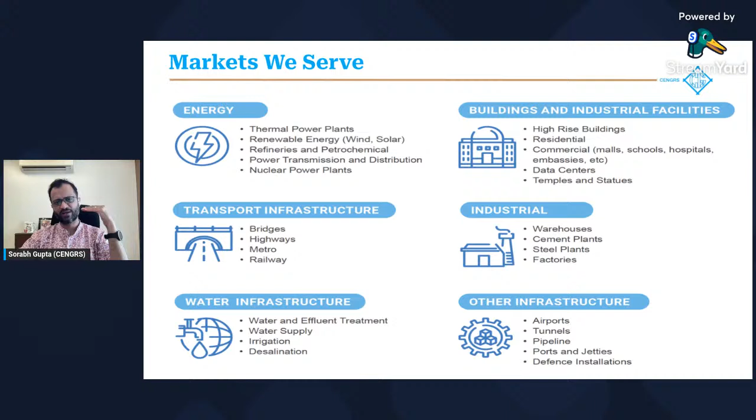Of course, you need investigations irrespective of the kind of project which you are building. We are very strong in the energy sector, where I think 70 to 80% of the thermal power plants in the country have been investigated by us. We have also worked a lot on nuclear power plants, solar, wind, building and factories, transport infrastructure, critical bridges, temples like the Ram Mandir temple investigation was by us, and so on and so forth. So pretty much we are excited to apply our knowledge and our expertise to any kind of project that might come up.

The company is led by Mr. Sanjay Gupta, who is our managing director, Mr. Ravi Sundaram, who is our technical director, and myself. I'm Sorabh Gupta. All three of us are from IIT Delhi, obviously with different years of graduation, but we are all IIT Delhi alumni, and our mission is to make investigations better.

This is a small map showing our project experience, and we have, I think, one of the largest private databases of geotechnical information in the country. So we took some time last couple of years, and we have mapped all our 6,900 projects on Google Earth. So we have this information ready in-house, and this helps us a lot. Every time we take up a new investigation, this database helps us a lot in correlating or doing a desktop study to correlate with what we found earlier versus what we're finding today.

So I want to recall. Last time we talked about CPT, we talked about the test equipment and procedures, and we talked about the CPT advantage. For those of you who could not attend last time, I'll just present a few slides to recap what we had discussed last time, starting with nomenclature. So there's a lot of confusion in nomenclature. We want to clear it up. DCPT is dynamic cone penetration test.

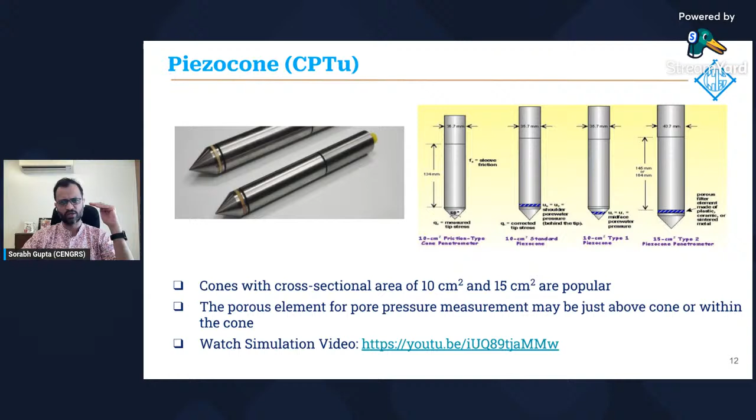There are various kinds of pushers available. A pusher is the device on the ground whose only function is to provide the thrust or load required to push the cone into the ground. There are various pusher designs we discussed last time - crawler mounted, truck mounted, seabed pushers, and so on. What we primarily use for investigation jobs are anchored trailer mounted pushers. It's anchored because part of the 20-ton resistance comes from the dead weight of the system, and the rest comes through augers installed in the ground - typically around 6 to 8 augers to provide the uplift resistance.

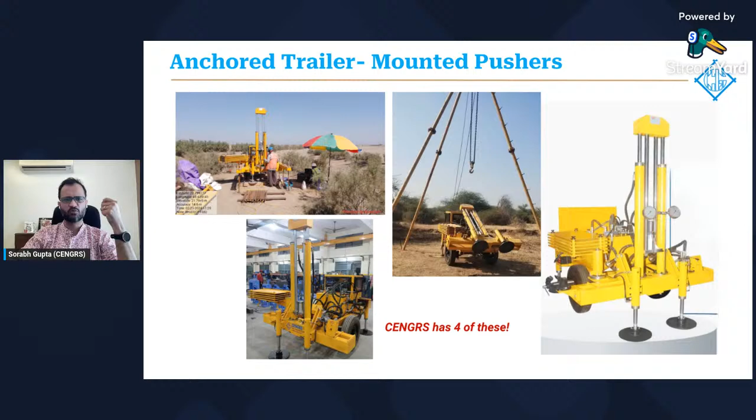We talked about this last time - this is the CPT advantage, and we went deep into how CPT is extremely fast. A 30-meter sounding can be completed in just under half an hour. The time difference between borehole investigation and CPT is tremendous - a 30-meter borehole gives results in about 15 to 30 days, while a CPT gives results in just about 4 to 5 hours. In today's hectic, fast-moving environment, CPT gives us the advantage of time, for pre-bid, preliminary, and detailed investigations. So time saved is money saved.

The second advantage is that CPT data is continuous or near continuous, which is extremely powerful compared to boreholes and other traditional methods, where typically we have data points every 1.5 to 3 meters. CPT is very accurate - it's operator independent, company independent, independent of pretty much everything. It's completely digitized, so what you measure is what you get, with no human intervention in the process of collecting CPT data, which also makes it very accurate. Plus, since the measurements are electronic and in situ, the resistance to cone penetration is actually measured at the cone tip level.

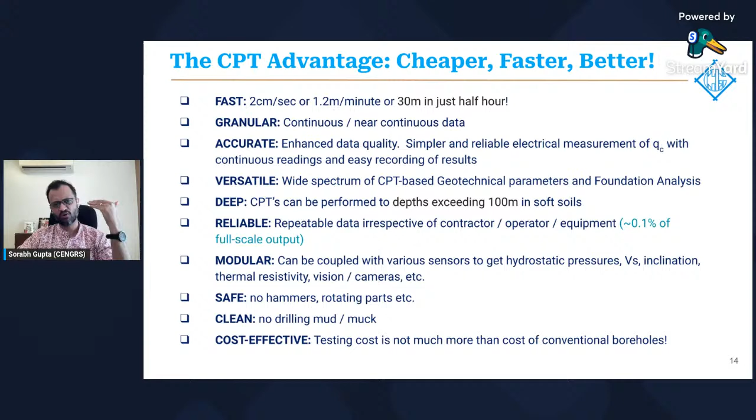It's very safe, clean, and lastly, and definitely not the least in a country like India, it's extremely cost effective. A lot of people feel that CPT, because of the heavy investment involved and so on, is very expensive. But actually, as it turns out, we are doing CPTs at roughly the cost of a conventional borehole, sometimes even less than the cost of a conventional borehole.

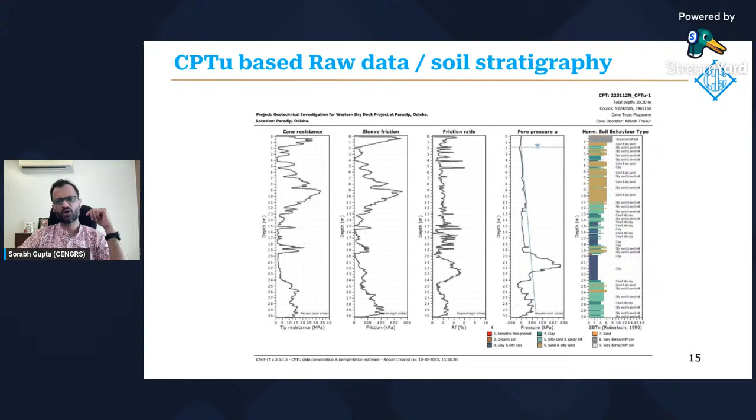So very powerful technology. This is what the typical CPT data looks like. You have the cone tip resistance on the left, you have the sleeve friction, friction ratio, and the dynamic pore pressure. And the fifth plot here on the right shows the soil behavior type, which is interpreted based on CPT.

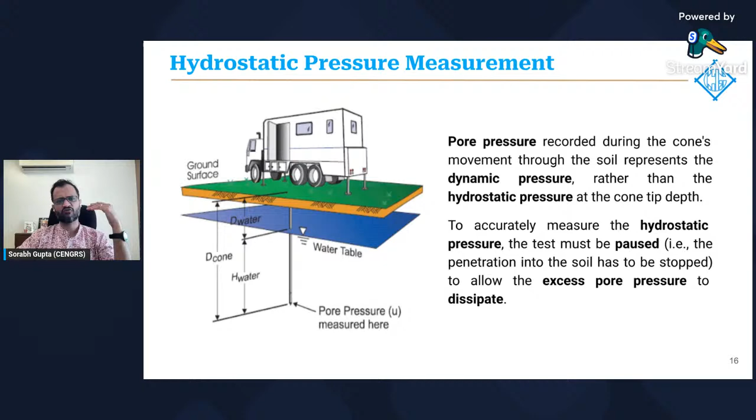We got a question last time as to how we can measure groundwater table with CPT. Again, if you're using a piezo cone and measuring dynamic pore pressures, it's fairly straightforward, because the dynamic pore pressure, if you're in sands, will quickly dissipate to the hydrostatic pressure level. Very useful to get an accurate measurement of the hydrostatic pressures at the depth of testing or at the depth of interest.

If you're driving a cone, since we're measuring excess pore pressures in a piezo cone, when you drive a cone you can actually stop it at any particular depth and let the dynamic pore pressures dissipate. Naturally, the rate of dissipation of the excess pore pressure would be proportionate to the permeability of the strata surrounding the cone, and this property gives us a very good function.

It's known as a dissipation test, which is a very simple test. You just stop the cone and watch the excess pore pressures dissipate. This data can be used very effectively for determining the hydraulic properties of the soil: permeability, coefficient of consolidation, T50, and so on and so forth.

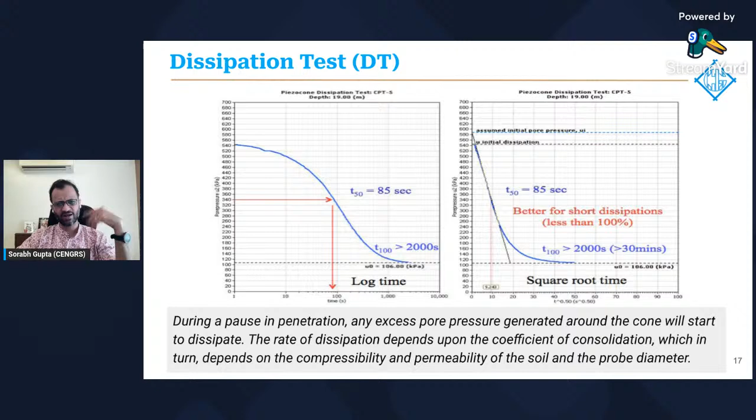Again, since it's in situ and there is no disturbance of the soil, aside from pushing a cone through it, the results of dissipation tests will actually give us very good in situ hydraulic parameters as compared to, say, carrying out a permeability test in the lab or in a borehole.

A lot of people also used to object to CPTs, saying that if you're doing CPTs alone, you don't get samples for lab testing. So although we don't often recommend carrying out CPTs by themselves, our recommendation is always to carry out a bouquet of tests at any given point of time, and to design the investigation program as per the technical requirements.

So usually we will have a few boreholes at least on a site for sampling. But even in a case where, for example, I'm doing a quick pre-bid investigation or a preliminary investigation and I just have a CPT rig at site, it is now possible. We are now collecting piston samples using the CPT apparatus itself.

This is very good because we can actually carry out the CPT, look at the strata on site, decide what is my depth of interest where I need samples, and I can move my rig by another 2-3 meters and then push back and collect fairly good quality samples using this kind of CPT sampler.

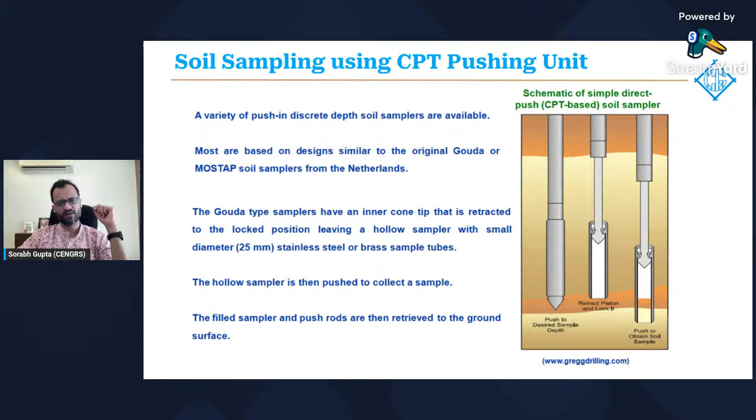Lastly, we had talked about the seismic CPT. This is a new addition at Cengrs. We got our seismic cone just earlier this year, and we're having a lot of fun with it because although we have been doing crosshole and downhole seismic and MASW for the last 15 years or so, borehole geophysics or borehole seismic was always a fairly expensive, time-consuming and difficult process. This was our experience because you have the cost of drilling the boreholes, the time it takes, and the difficulty surrounding actually grouting the boreholes properly as per ASTM standards. So it is a costly affair.

It used to take maybe around 15-20 days before you get a proper shear wave velocity measurement. But with shear wave velocity becoming more and more a preferred geotechnical parameter for analysis, the seismic CPT comes to the rescue because now we have a cone which has got accelerometers and geophones built into it. So we can push while doing the CPT, stop the cone, impact on the ground, and the seismic waves are captured by the cone, similar to a downhole seismic borehole test.

And with this, you get a fairly good shear wave velocity profile with depth. One thing I want to point out is, in our experience lasting only a few months, what we have observed already, and which is very encouraging, is that the quality of the seismic data we get in a seismic CPT is fantastic. The seismograms we get are fantastic compared to what we get from surface geophysics and even from borehole geophysics.

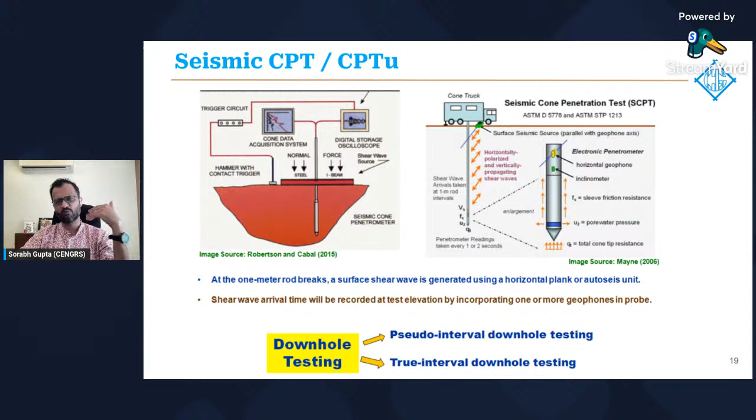So it's a very encouraging technology, and going forward we hope to increase the application and understanding of seismic CPTs in the country. So that was a quick recap of what we had discussed last time. I will quickly jump into today's topic, CPT interpretation. Very quickly, a quick overview, applications, and I'll show you a few case studies.

Starting with the interpretations, as we discussed last time, CPT is very powerful. This is the beauty of the test, right? You can push a cone into the ground, and in about 30 minutes, you get a wealth of geotechnical information from a single push. It's possible to understand the state parameters, consolidation and permeability properties, very good strength and stiffness properties, and very good soil profiling. In fact, CPT is a very good test for quick profiling across a large area. And we also get the OCR and compressibility parameters.

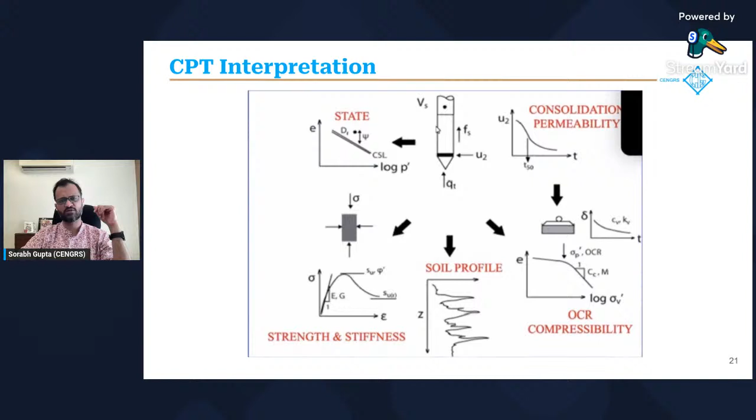Let's look at each of these turn by turn, how these parameters are determined. Before that, this is something I found from Dr. Peter Robertson's handbook on CPT, a very good reference which I would recommend to all of you. They had these tables, and I found these very interesting.

So you see the applicability of SPT interpretations. This is published data which shows, for different soil types, what is the applicability of SPT interpretations for determining various geotechnical parameters. A value of 1 shows that it is highly applicable, meaning the SPT data is very useful for getting a good hold of that particular parameter. A value on the low spectrum, a value of 5, shows that it's not really applicable, and the correlation between SPT and that particular geotechnical parameter is not very strong.

So you'll see, for example, that SPT is fairly good for getting your undrained shear strength parameter—not so good, you have an applicability of 3 to 4. For most of the other parameters, your applicability of SPT is roughly 4 to 5, which is very poor.

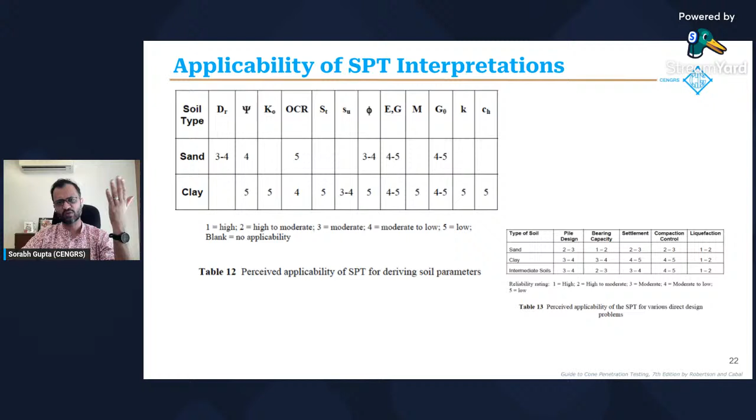And this is what we are trying to educate people on—that geotechnical work is not about boreholes, right? So borehole investigations, although we are comfortable with them, all of us are, it's traditional, it's very conventional. We are used to seeing N values, but we have to keep in mind that borehole investigations have a lot of limitations—technical limitations, not only in terms of execution, but also in terms of interpreting borehole data to get our geotechnical parameters, and also interpreting borehole data to get our foundation analysis parameters.

Compare that with the applicability of CPT. I've superimposed the numbers shaded in yellow showing the applicability of SPT. In almost all cases, CPT based interpretations are a lot more robust compared to SPT based interpretations. In plain English, if I want the undrained shear strength parameter, or the OCR or the stiffness parameter, the modulus, I would rather interpret these from CPT if I have that information rather than getting it from borehole data.

Same is the case for bearing capacity, settlement, compaction control, and liquefaction analysis. The applicability of CPT data is a lot higher, and this is published data, as compared to using borehole or SPT data to get foundation analysis parameters.

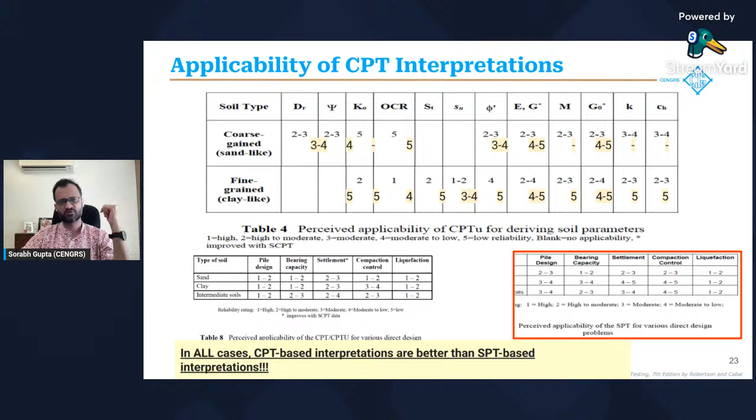We talked about and saw the chart earlier where we had identification of soil type from CPT, and there's a lot of work on this. People like Dr. Peter Robertson and Professor Mayne have really spent years, decades almost, developing all these correlations and charts, and we respect them and are thankful for their efforts.

So these are the kind of charts you have. It's fairly straightforward. On the y-axis you have the cone resistance, on the x-axis you have friction ratio. These are direct measurements we do in the CPT. So if you just plot these direct measurements on this kind of chart, depending on where the data plots, it gives you what is known as the soil behavior type.

Obviously, if you look at the top left of this chart, as cone resistance increases with lower friction ratio, typically these are sands. As you go to the bottom right of this chart, where you have low cone resistance but high friction ratio, that's more clay kind of soils, because clay will naturally have lower cone resistance and higher friction ratio.

I want to point out the difference between soil behavior type and the typical soil classification we talk about when we do laboratory testing. These two are similar, but not exactly the same. Traditional soil classification is based on grain size analysis and Atterberg test results and so forth, and that's the unified classification system.

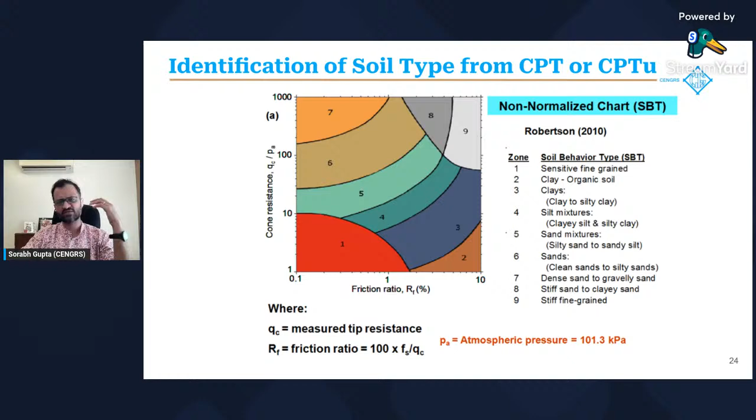Essentially, we talk more in terms of drained and undrained and dilative and contractive behavior when we talk about CPT-based interpretation, which actually makes a lot more sense to me as far as understanding the behavior of soil to foundation stresses is concerned.

That said, we have carried out a number of cross correlations on our sites where we have done boreholes and CPTs, and we've made it a practice at Cengrs that we always take data from various tests and play around with it, cross correlate and compare. What we have found is that the comparison between CPT and borehole data in terms of stratigraphy or soil type is fairly good.

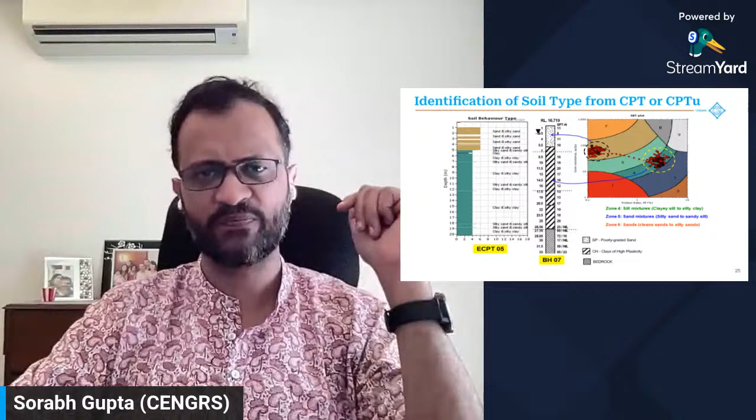Since you get a fairly good understanding of profiling in a very limited time and with very good accuracy of as less as 2 centimeters, CPT is a fantastic tool if I just want to go to a large site. We are doing a site right now in Gujarat where it's a huge plot and the customer just wants to understand the lateral variation, the stratigraphy across the site before deciding a detailed geotechnical investigation program.

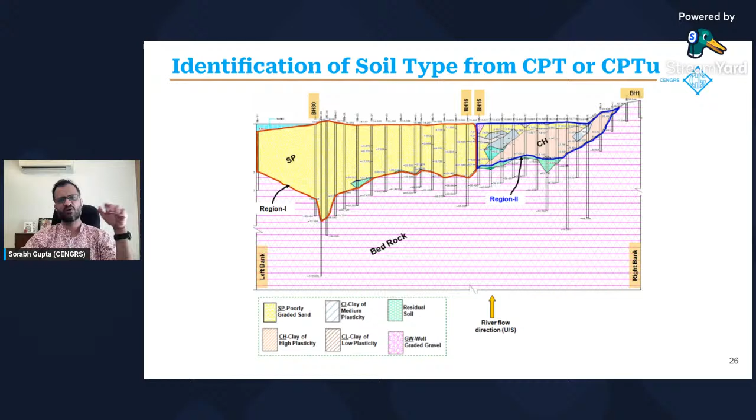So we recommended, and the customer asked us to do a bunch of CPTs all across the site. We could finish all the CPTs, around 50 to 60 CPTs in a matter of days. Very quickly, we got a very good handle on the stratigraphy or the lithology across the entire site. So it's a very powerful, quick test for stratigraphy.

I'm not a huge fan of N value, and the more years I spend as a practicing geotechnical engineer, the less fond I am of the standard penetration test. Maybe that's a topic for a separate discussion. But still, most geotechnical engineers swear by SPT, and we remain comfortable with it out of inertia.

To solve for this, there are now several correlations, including in our Indian standard code, between the cone tip resistance and the SPT value. We have checked this, and you'll see in the case studies where we compared the interpreted SPT N60 value from CPT with actual SPT measurements from nearby boreholes, and the match is fantastic.

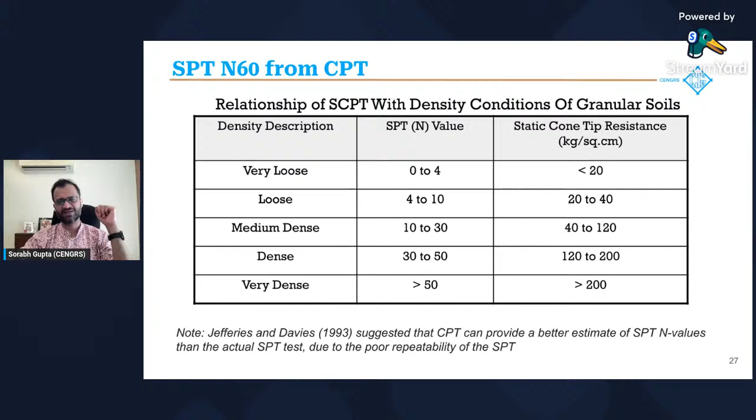It's also possible to get a fairly good estimate of soil unit weight from the CPT data. I'm going to jump through these slides, and this presentation will be available to you. If you want to get deeper into how these correlations were developed, I'd recommend going through what I call the CPT Bible, a handbook on cone penetration testing by Professor Peter Robertson and Cabal. The latest version was released just last year, and it's free to download on the internet. A lot of these correlations we have picked up from his handbook.

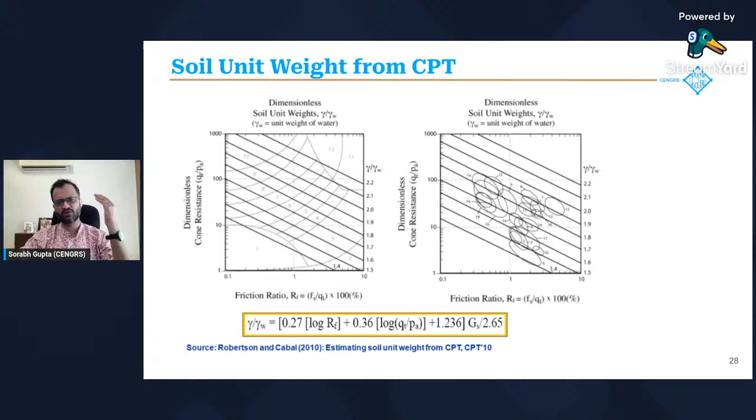So I'm not going to go through the equations today, just giving you a quick flavor of what is possible from CPTs. We get a soil unit weight from CPTs, and you can plot this.

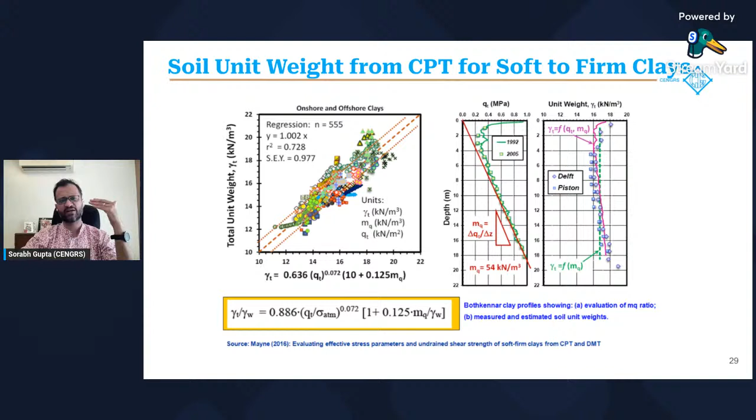Again, I want to point out that over the last 50-plus years, all of these correlations have been cross-correlated with field test data, with trials, and countless PhD theses have been published on CPT-based correlations. This has been tried and tested all across the world where CPTs are done, and they've been slowly improved to such a level that now, when checking these correlations for Indian soil conditions, we are finding them spot on.

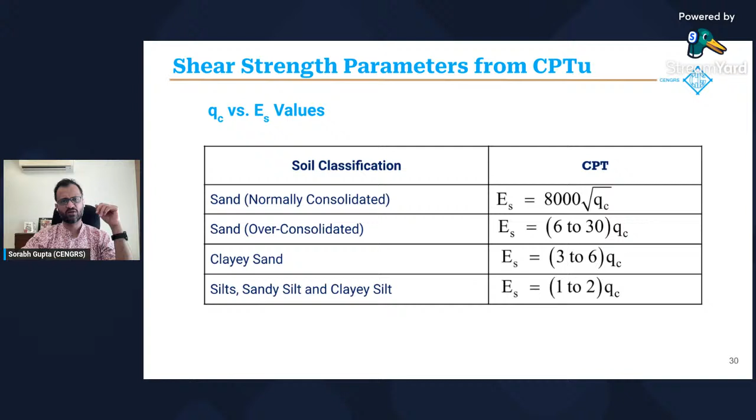Again, shear strength parameters from CPT. So your QC versus your shear strength parameter, your Es. You can also pick up, in terms of shear strength parameters, the peak friction angle, or the angle of internal friction, based on CPT values.

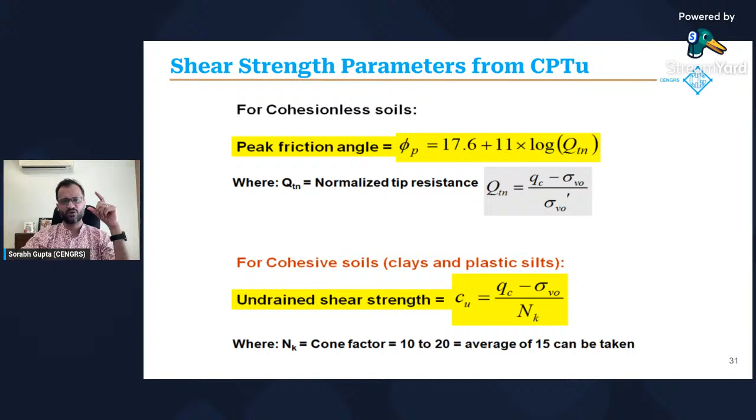You can also get a very good undrained shear strength profile from CPT, and this is something we have used quite a bit. We have compared undrained shear strength profiles from CPT versus boreholes, versus lab testing, and versus field vane shear tests. I feel that especially with marine clays, the undrained shear strength profiles we get from CPT are very, very useful.

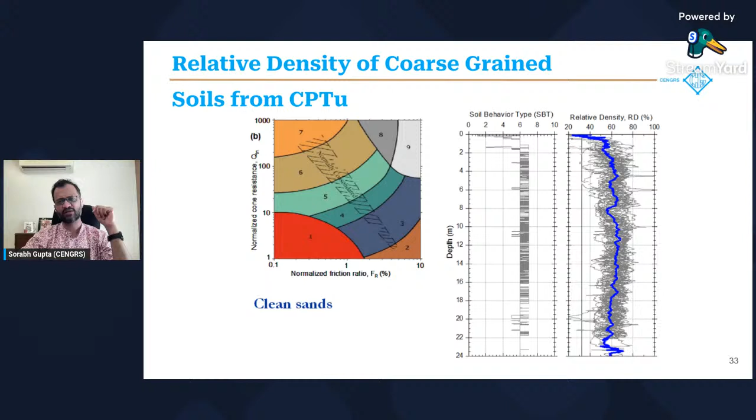Relative density of coarse-grained soils -- I'm skipping through this just to give you a flavor. You can plot relative density in sands, and obviously you get a very good correlation of relative density with depth.

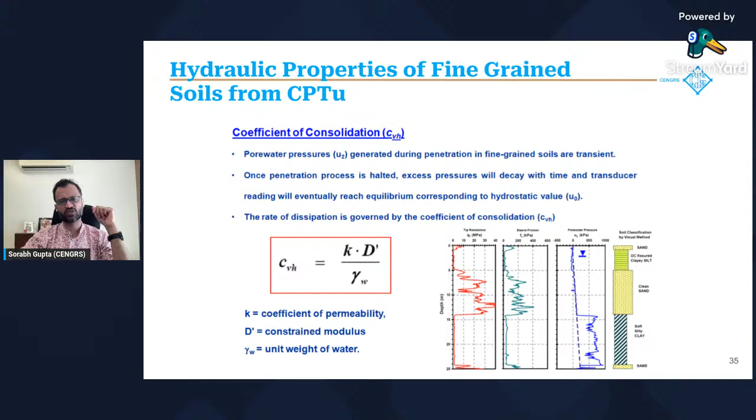We talked earlier about hydraulic properties of fine-grained soils. You can see how we can get the coefficient of consolidation from the CPT data directly. And as discussed earlier, it's also possible to stop the cone and carry out a dissipation test, which gives an even better, more refined estimate of the coefficient of consolidation and T50 values at that particular depth.

If you're working in compressible strata below the water table where consolidation and secondary and tertiary settlements are likely, I'd highly recommend taking the time and effort to stop the cone and carry out a few dissipation tests, so we can get very good compressibility parameters in situ.

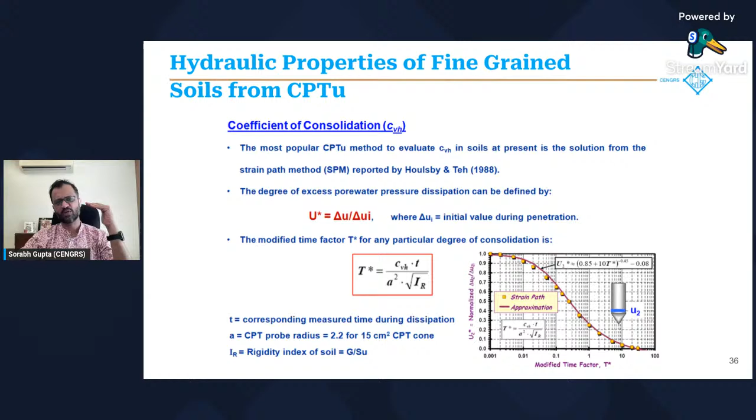So this is the same thing -- the coefficient of permeability is also sometimes very important. These days, we're carrying out lots of projects requiring dewatering, or you may have a case where you're designing, say, a dam. In these kinds of applications, getting a good handle on the actual coefficient of permeability in situ becomes quite critical. We can get that from CPTs.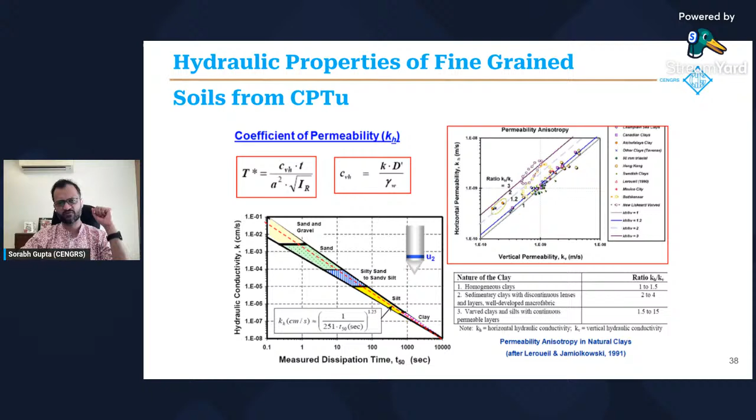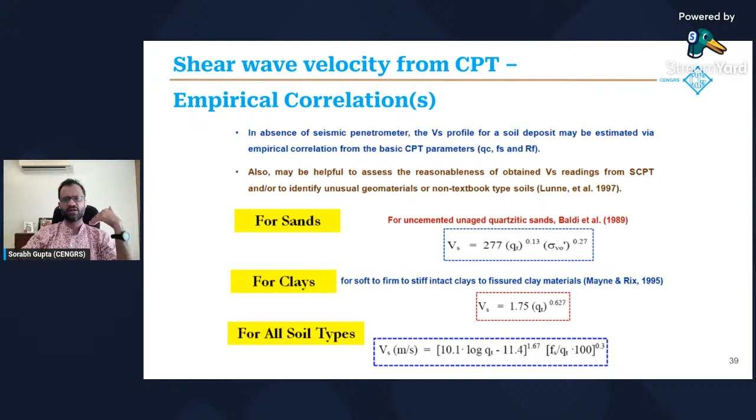We talked about the seismic CPT, but even if you're doing a regular piezo cone test, the CPT values themselves—much in the same way as we have correlations from SPT N value to shear wave velocity—we also have correlations from CPT data going to shear wave velocity. So this is correlated shear wave velocity, which you can get from regular piezo cone data.

Naturally, since we bought the seismic cone, we were very curious to see how our correlated shear wave velocity from CPT data matches actual seismic measurements. So we went ahead and checked, and we found that the correlated value of shear wave velocity matches what we get from the seismic cone fairly well.

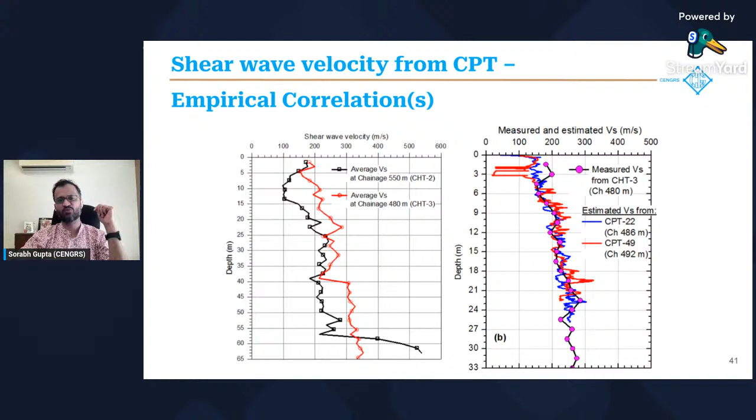We also were very happy to find that the seismic CPT shear wave velocity matches the cross-hole seismic test values very well. The difference, of course, is that cross-hole seismic is not only more expensive and time-consuming, it's also very hard to get clean seismograms in a cross-hole test and to get actual picks of the shear wave velocity arrival. In a seismic CPT, we found that the post-processing of the data is a breeze compared to what we had in borehole geophysics. So that's CPT interpretation.

It's 10:37. I'll talk a little bit about CPT applications. We previously talked about how we can go from CPT data to interpreting the geotechnical parameters. Now, why do we need the geotechnical parameters? The purpose is because we want to plug in the geotech parameters and carry out a foundation analysis. Good news is that we don't actually need to go through the intermediary step of determining the c, phi, and E values—we can directly apply the CPT values for foundation design.

There are some very well-established empirical correlations for this. We'll see how we can do shallow foundation design, including determination of bearing capacity and settlement. We can do deep foundation design, where we get safe pile capacities in vertical and lateral directions and so on. We'll see how we can do seismic design, particularly liquefaction susceptibility analysis based on CPT. We'll also see how CPT is used in ground improvement control and for design of wick and sand drains. So this is the range of application of CPT results.

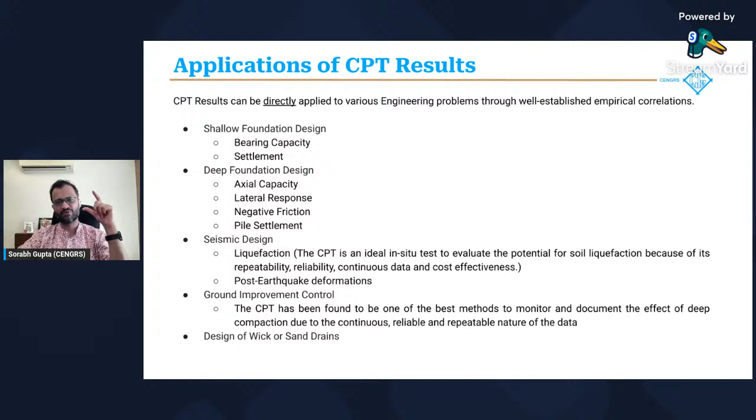I want to emphasize that if you look at the timeline, it's possible for me to do a CPT on site, say today morning at 10 a.m. At 11 a.m., I can just email the results to my office. There are so many commercial softwares available for CPT-based design and interpretation—we can upload the data into the software, and by 11:15 a.m., which is 1 hour and 15 minutes from the time we started the test, it's possible for me to get the safe pile capacities right then and there. Very powerful for us. I think in this fast-moving world, this is what we need: innovations which help us save time and money and help us reach our conclusions faster.

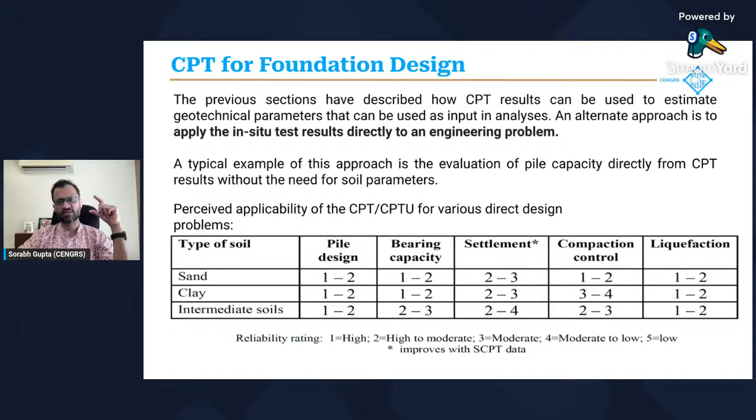We had talked about this earlier—we are focused on the applicability of the data for determination of geotechnical parameters. There's a similar table given in Professor Robertson's handbook, where he talks about the applicability of CPT data for various design problems. You see here that the applicability of CPT for different soil types for pile design is 1 to 2, which is very high, meaning your CPT data can be used directly to get a very good estimate of your safe pile capacities.

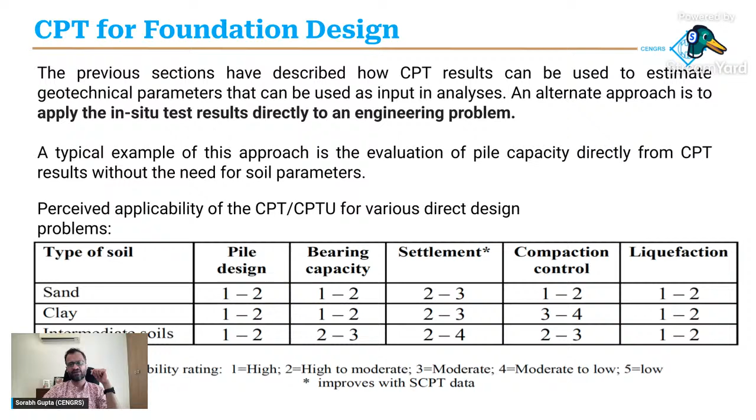Similarly, it's very good for bearing capacity analysis, which relates to your shear strength parameter, particularly for sands and clays—maybe not so much for intermediate soils. It's extremely good or fairly good for settlement analysis, extremely good for compaction control in sand, and also extremely good for liquefaction susceptibility analysis.

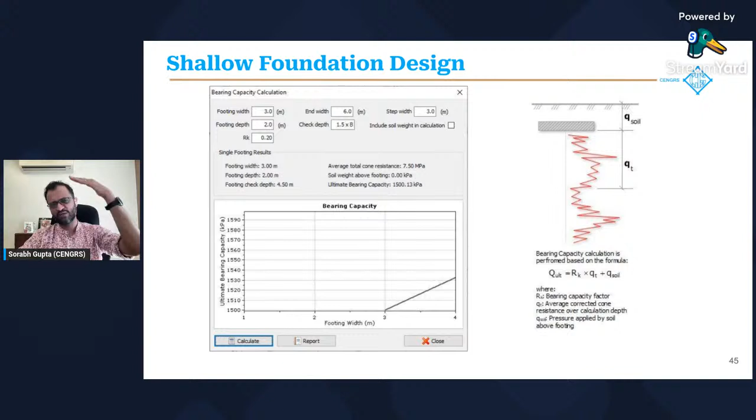When we talk about shallow foundation design, the traditional approaches cover the strength criterion and the settlement criterion. For strength criterion, which is what we call safe bearing capacity, you can enter the CPT data directly and get a very good handle on the ultimate bearing capacity or safe bearing capacity for a given foundation size and depth.

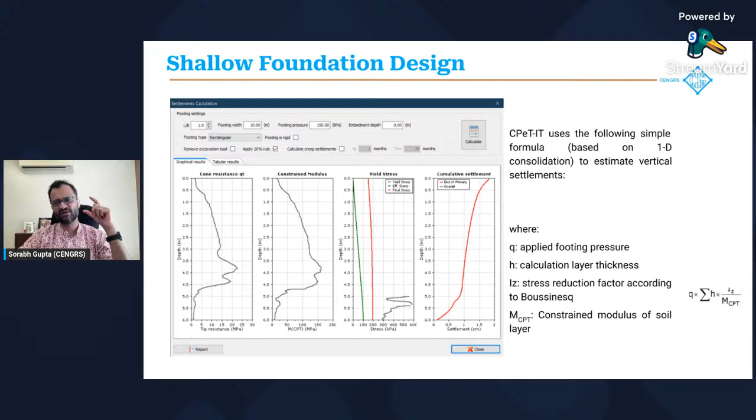Similarly, we can input the CPT data to predict foundation settlements for open and raft foundations. The reason we're able to do this is because in situ testing gives us the ability to get the constrained modulus in a fairly accurate form, so we can get settlement predictions.

We did this when we started with CPT a couple of years ago. We didn't believe what we read, so we carried out a lot of in-house validation, where we carried out our standard strength and settlement predictions based on borehole data and lab test data. Then we did a CPT at the same site and calculated the open foundation numbers based on CPT as well. We were quite pleased to see that the results compared very well, to a degree of about maximum 5% error or so.

But comparing two different methods is not enough, because what really matters is how the soils actually behave when we construct on it. So as a step one, we went ahead on a few sites, and we have some papers on our website where we have described this in detail.

In one of those papers, we did settlement predictions based on various methods, including SPT, CPT, pressure meter and so on. Then we constructed a 1.5 meter by 1.5 meter footing and loaded it down to, I think, 600 or 800 tons. We matched the predicted settlement from CPT versus the actual observed settlement of the footing on site, and the comparison was fairly good.

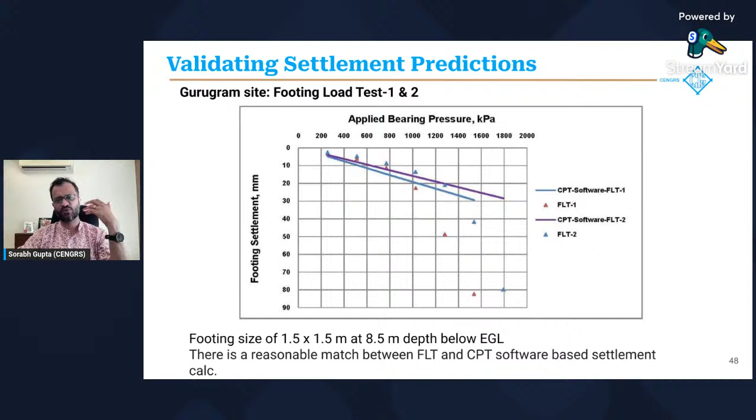Similarly, pile capacities. Pile capacity determination from CPT data is very old, and this started from the offshore industry, where naturally, when they have to construct jack-up barges and so on, they don't have time to do boreholes or wait for lab testing. So CPTs have been very popular in the offshore industry for the last 50, 60 years, and this is where I think it was born. Pile capacity determination from CPT is very good; you can get very good quality prediction of pile behavior.

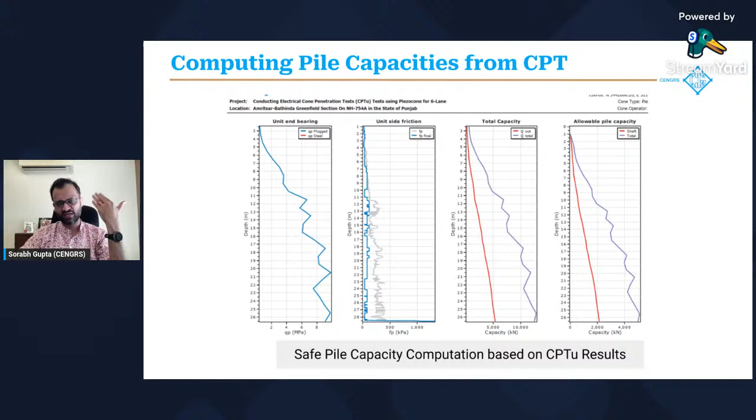The reason for that, I think, is because a CPT really is a lot like a pile being driven into the ground. So if your test is mimicking the actual construction process, naturally the prediction from that test will be very robust and should match what we get in the real life scenario.

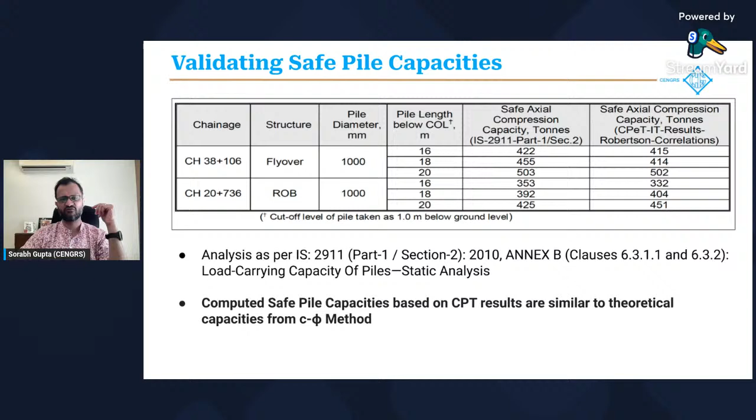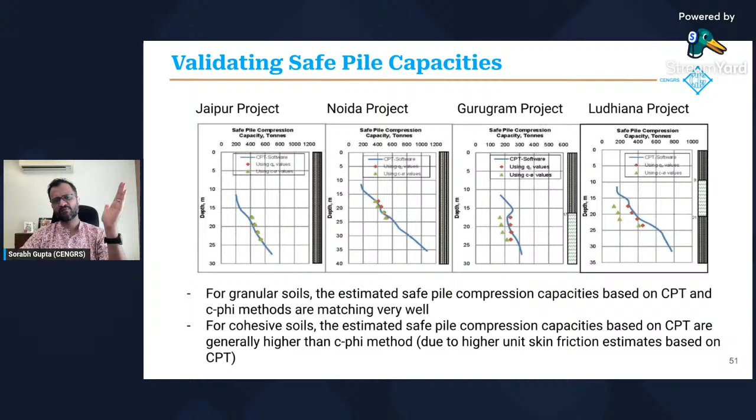Once again, we did this in-house at Cengrs. We predicted pile capacities based on the standard IS method 2911. We also predicted safe pile capacities based on CPTs done at the same site, and once again the predicted pile capacities were a very good match. We did this for several sites and different soil conditions, and validated our pile capacity predictions across various geographies and soil types as well.

So that is how CPTs can be used for design of open foundations and pile capacity design. I want to point out that a lot of projects these days are going in for ground improvement. I think the reason is that we've run out of good sites, so now most of the sites we get for our projects have poor soil conditions where no one thought about constructing, say, maybe 30, 40 years ago.

And now we don't have an option, so we have to construct in the given situation. A lot of ground improvement works are happening these days. People are going with vibro stone columns.

People are going with various kinds of ground improvement techniques, and this is good. But I want to point out that CPT has also found its own special place in validating the efficacy of these ground improvement methods.

If I'm installing stone columns in the ground, my interest is in understanding the changes in stiffness, strength parameters, and overall permeability of the strata before and after carrying out the ground improvement process. As we discussed earlier, we get all these parameters from CPT very quickly and with a lot of accuracy in a single push. So doing CPT before and after ground improvement is actually a very good field validation test.

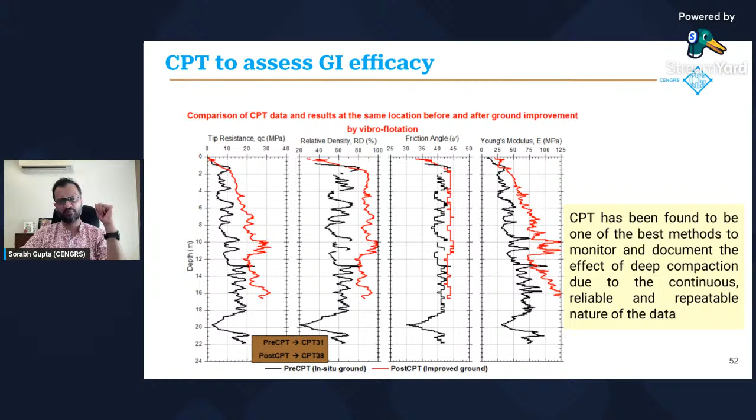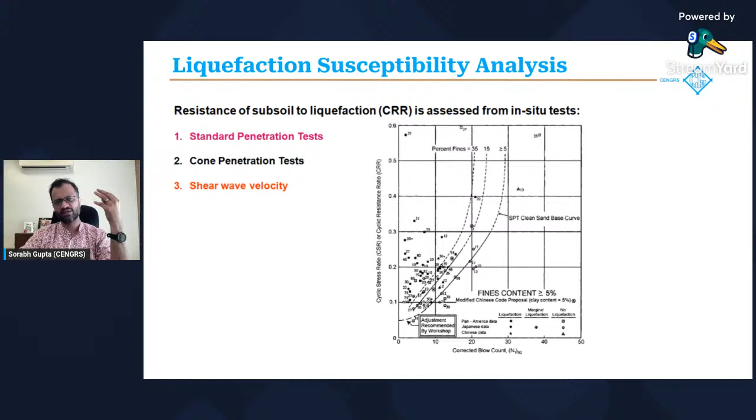Liquefaction, again, has been a subject of a lot of discussion on many projects, and it's tricky because liquefaction is something we are still understanding as a fraternity. The seminal paper on this is by Youd et al., which talks about how the cyclic resistance ratio can be assessed from three different in-situ tests: the standard penetration test, the cone penetration test, and the shear wave velocity.

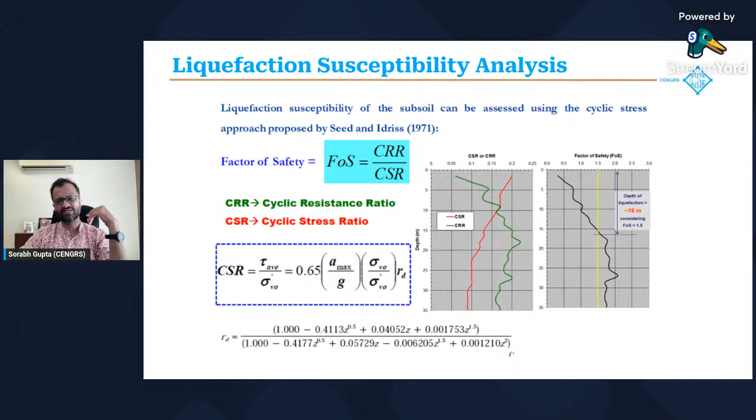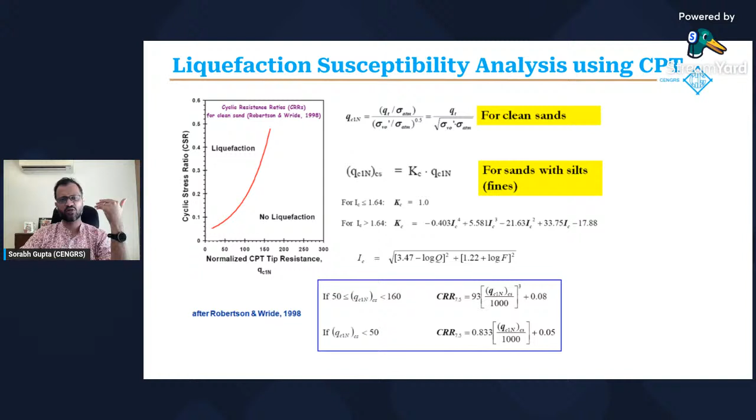For cyclic resistance ratio, we have correlations based on SPT, so I have not presented that. In the same paper, there's a graph and formula for getting cyclic resistance ratio values from the normalized cone tip resistance. Similarly, we can determine the cyclic resistance ratio from the shear wave velocity profile.

The question is - and we've done this on several sites along with a lot of literature survey - worldwide the belief is that the CRR value from CPT and shear wave velocity is what should be adopted. The CRR value from SPT is a little coarse and possibly not very reliable. That partly has to do with issues with SPT itself, with doing good SPTs, and partly with how the empirical correlation was developed, since SPT is non-standard and done differently across the world.

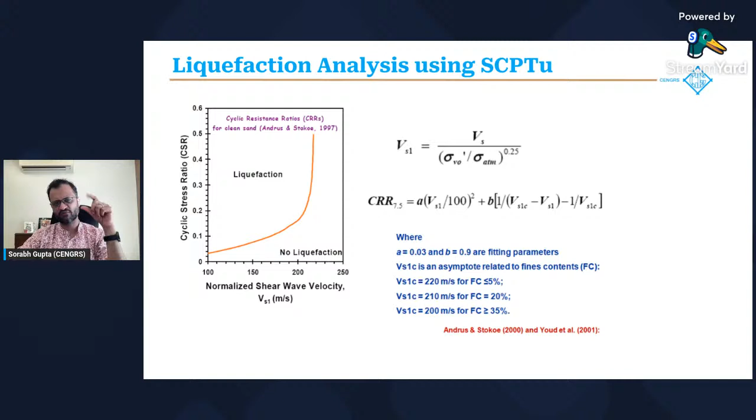CPT and shear wave velocity, since you have good repeatability of these tests and good accuracy, are what we should trust for CRR values.

Interesting point here - remember how we talked about the seismic CPT, and we said we get not only the CPT data but also the shear wave velocity profile. So a seismic CPT is actually a very powerful test for a site with liquefaction potential.

The reason is that in a single push, within maybe half an hour or an hour, we get a wealth of information. We get the shear wave velocity profile, which can be used for ground amplification studies, site response studies, and for determining the CSR value - the cyclic demand on the soil.

At the same time, we get the cyclic resistance ratio not from one but from two approaches. You can use CPT data to get the CRR, and simultaneously, for the exact same location, you have a shear wave velocity profile that can also be used for double-checking the CRR value. This is great because now, possibly for the first time, we can get a very good handle on both the cyclic demand and the cyclic resistance at our site in a single push.

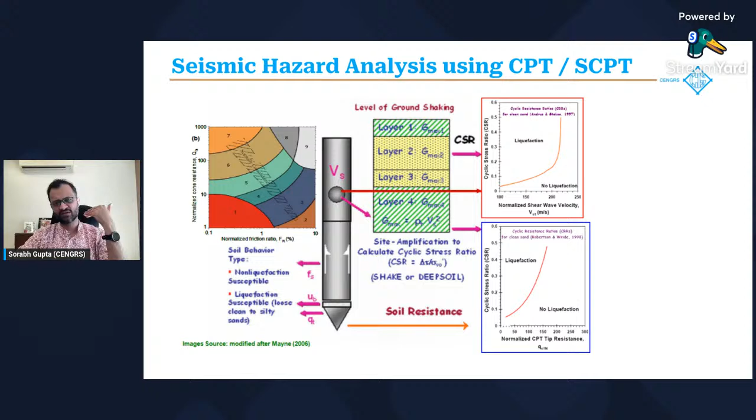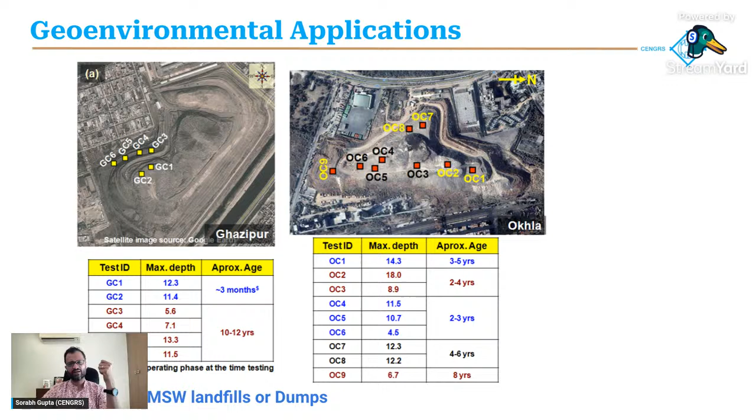So that's it, we've talked about foundation analysis and liquefaction analysis. Very quickly, CPT has also found a lot of applications for geoenvironmental purposes. Possibly not so much in our country yet, but in North America and Europe this is very popular because you can add a bunch of sensors to the CPT to carry out environmental due diligence and environmental testing as well. This is not my area, so I'll just skip through this.

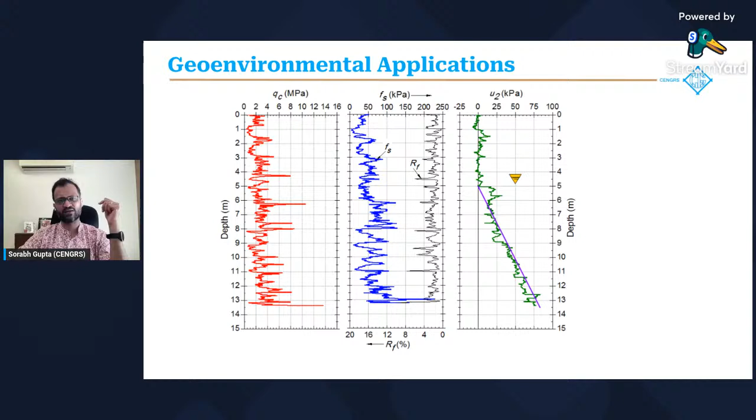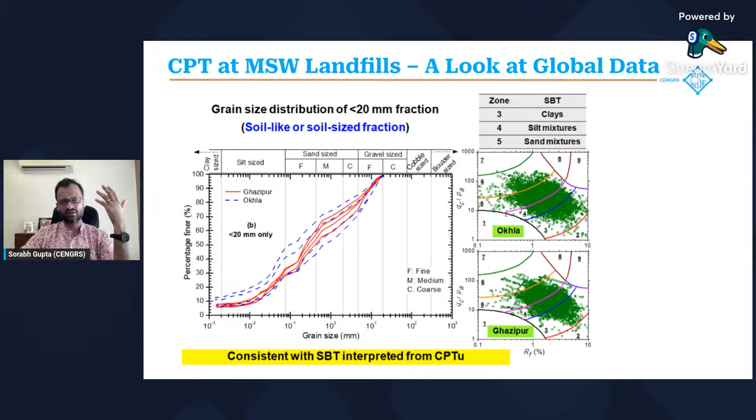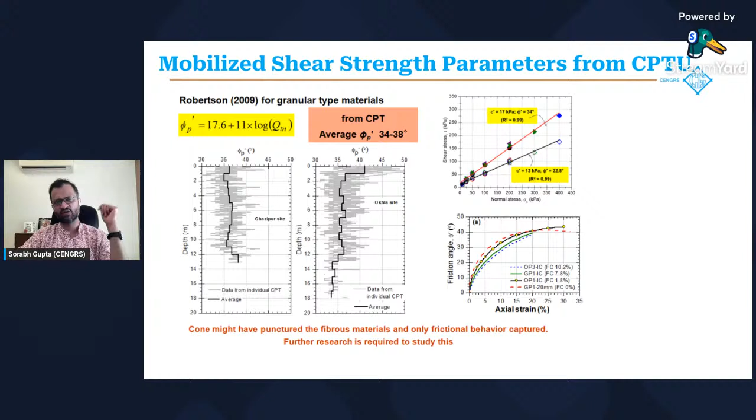So that's it about applications.

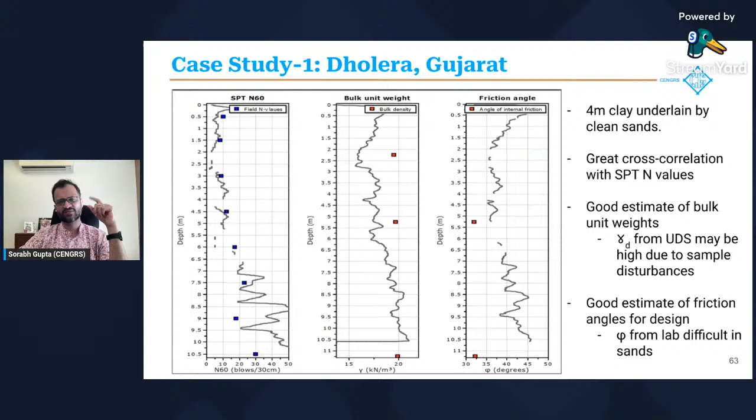We have a few minutes, so I will show you some actual CPT data. The first case study is just one slide, from a project site in Dholera. We did this with IIT Delhi, where we had some borehole data and also CPT data, and we've compared the two. I'll present three plots.

The first plot on the left is SPT N60 versus depth. The blue points are the actual measured field SPT values at that site. Remember, these are N60 values—as a practice, whenever we collect SPT values we always use automatic trip hammers, and we correct the SPT values to 60% ETR by doing an SPT energy measurement at site. The black line is the interpreted N60 value from CPT data through empirical correlations. Look at how well the N values match what we predicted from CPT.

The second plot is a comparison of the bulk unit weight from CPT, shown as the black line, versus the red dots, which is what we got from our Shelby tubes. You'll notice the two don't really compare well. Our interpretation, our takeaway, is that the unit weights we get from so-called undisturbed samples from boreholes are typically not that reliable, because of issues in sampling, transport, and measurement itself—but still a fairly good cross correlation.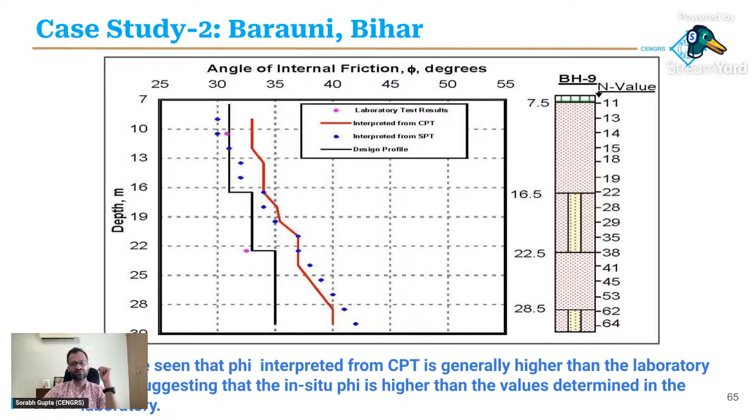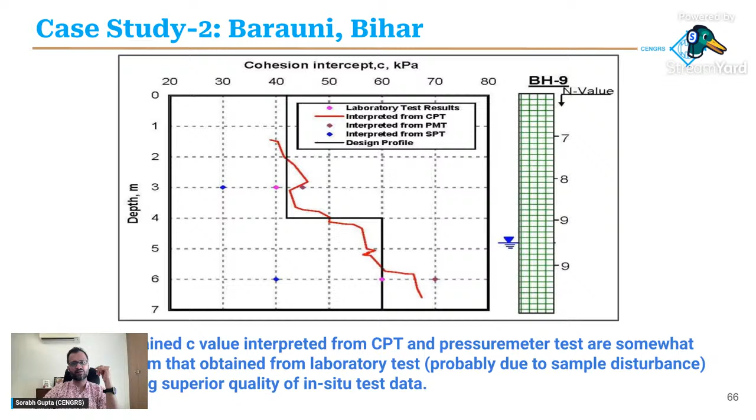Similarly, we checked the cohesion intercept from the same data, and we also interpreted the cohesion intercept from pressure meters, which we did at the same site. The values match each other quite well. On the lower end of the spectrum are values which we get from SPT. In situ testing essentially gives you a better, more robust handle of undrained shear strength determination.

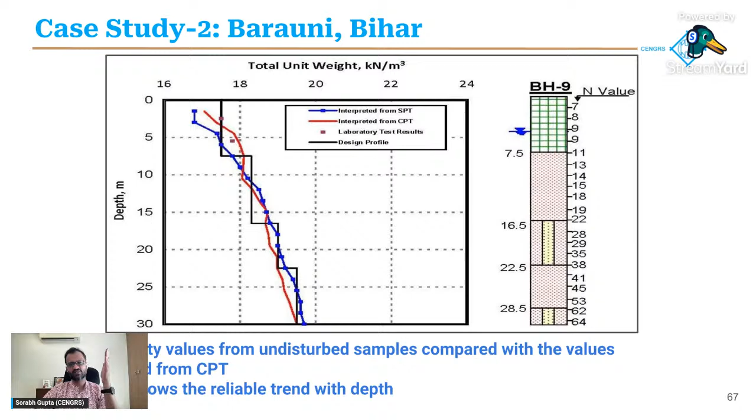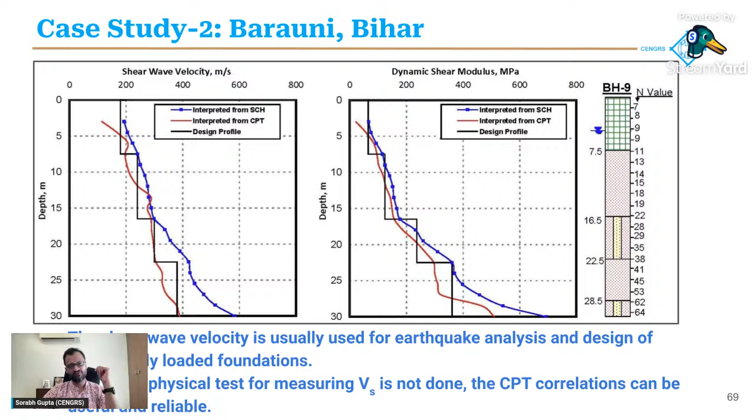This is a plot of total unit weight: what we get from SPT versus CPT versus actual measurements in the laboratory. Very good match. We also compared pre-consolidation pressure, over-consolidation ratio, shear wave velocity, and dynamic shear modulus.

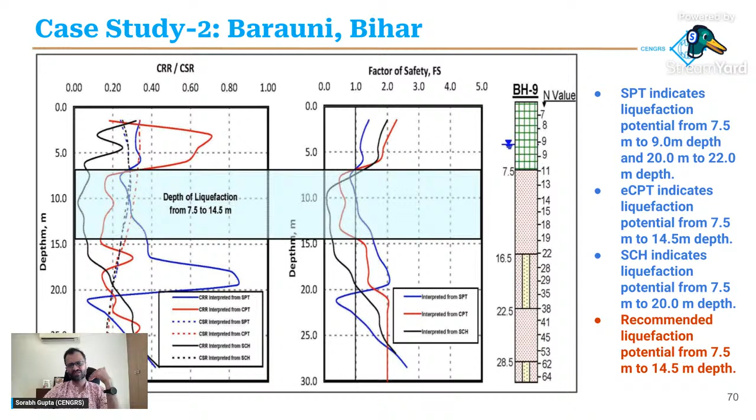Remember how we talked about getting your cyclic resistance ratio. So here we actually did all three: we got CRR values from SPT, from CPT, and we had also done a few crosshole seismic tests on this site, so we got CRR values based on shear wave velocity too. Comparing the three, we gave more weightage to CPT and shear wave velocity measurements, and we could decide very quickly what is the zone in which liquefaction is probable.

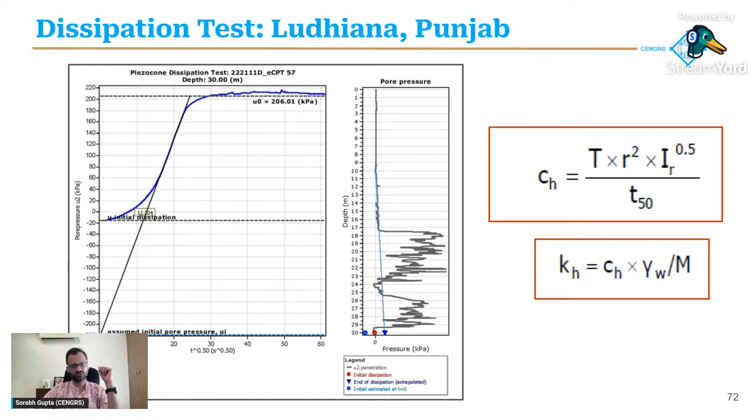Similarly, we did dissipation tests in Ludhiana also for another site. This was an interesting site, and by the way, this is a recent project which we did. I just want to take a few minutes on this.

The customer asked us to do around 150 boreholes on this site. They were developing a fairly large steel plant in Ludhiana, a greenfield site. The cost of the entire investigation program was, say, X, and the time required was working out to be 4 to 5 months because a huge amount of testing was involved.

So we went back to the customer and sat with them. We understood the design requirements and realized that it wasn't more boreholes they needed. What they really needed was to understand the stratigraphy across the site, particularly the liquefaction susceptibility zones and the pile capacities at this site.

With that understanding, we asked them to maintain their original budget, which they had already accounted for. Instead of doing 150 boreholes, we recommended just about 30 to 40 boreholes, and for the rest of the test locations we went ahead and did CPTs. The result was we saved about 15% in the cost of investigations.

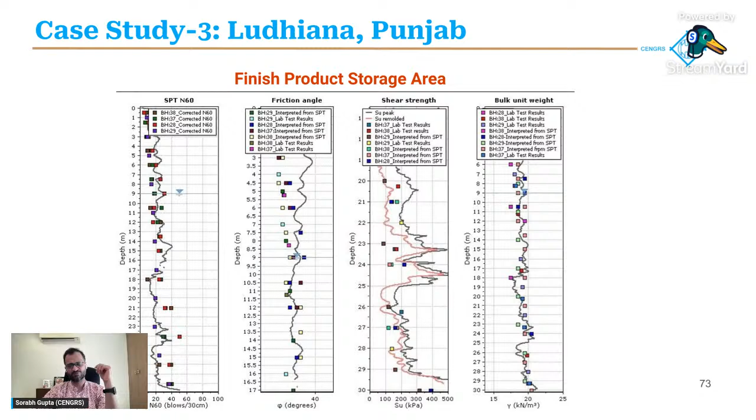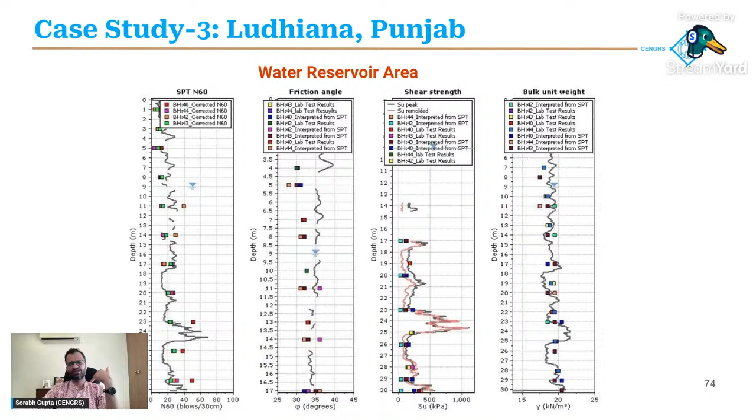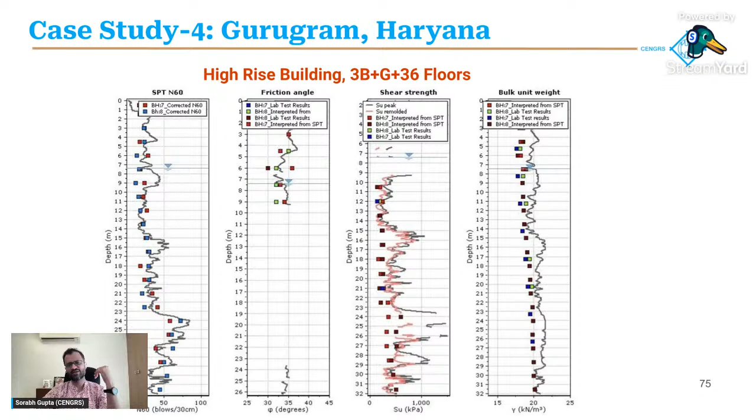Going back to the Ludhiana project, we did a lot of cross correlations between the borehole data, which was interspersed with CPT data. We were encouraged by how well the two test results matched. This became a nice trend, and nowadays we're doing CPTs for high-rise building projects in Gurugram, pushing CPTs down to 30, 40 meters. We're doing fewer boreholes, complemented with other in-situ testing like CPTs, pressure meters and cross-hole seismic, and really having a lot of fun getting good quality in-situ data for our designs.

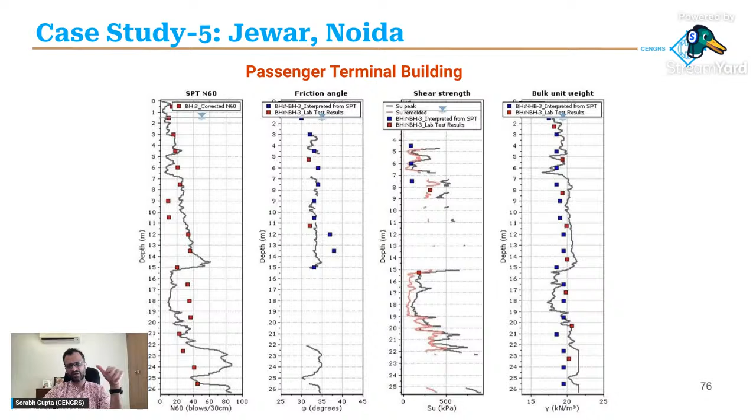This is an airport project in Jewar, Noida, where again it's a large site. We did some CPTs to complement our traditional investigation data.

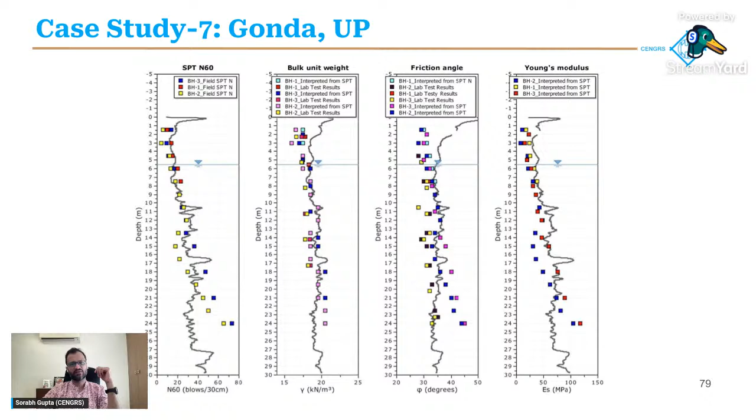These are silo projects. This is one in Sandila. This is one in Gonda. Sonipat, this is a prefabricated... this is a shed actually. Patna, and so on and so forth.

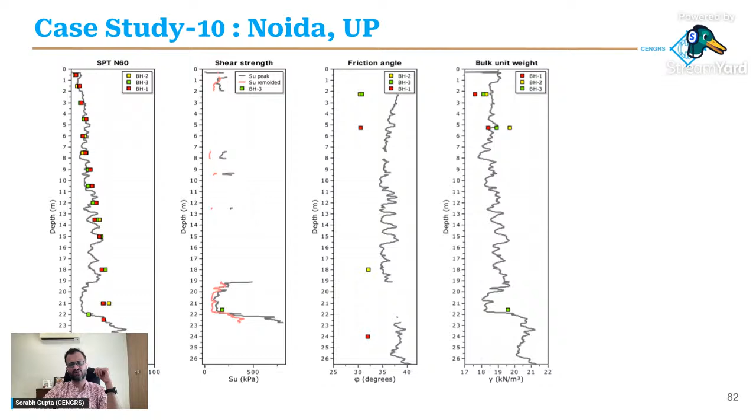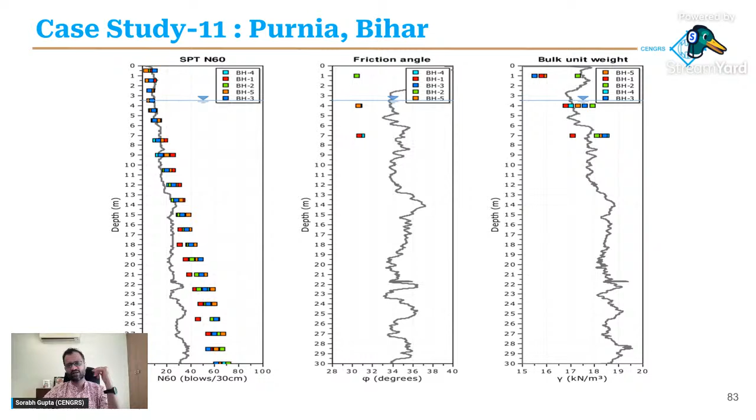Most of this you can see more carefully in your own time, but the point is that CPT is not new anymore. A lot of people resist CPT thinking it's a new technology, and what we're trying to educate people is that it's not new, it's 50 years old. CPT first came up in the 1960s, when electric CPTs started being used in the world. In India it's relatively new, but even here, at Cengrs we've done possibly around 2,000 CPTs in the last year alone. So there's a lot of data already available to us, and the data is very encouraging.